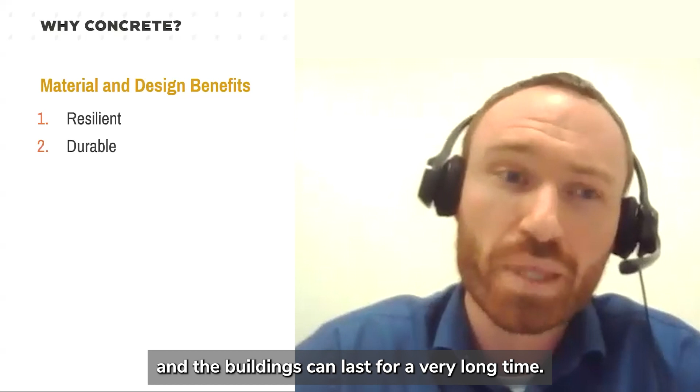First, it's very resilient. It can be detailed and constructed to perform well under seismic events, good for hurricane regions, has strong fire resistance, and the buildings can last for a very long time. Being so durable, they can last for decades and decades. And even when a concrete structure does experience some distress or have needs of repairs, there's well-established methods and materials for those repairs that can extend the life of the structure.

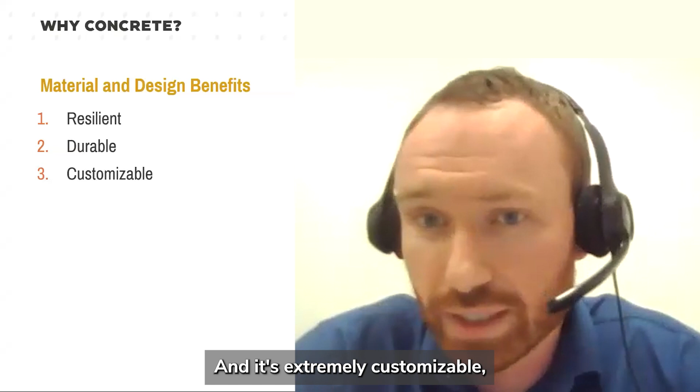And it's extremely customizable, both for the adjustment of formwork to make the different beam depths that you may want on a project, all the way down to the concrete mix design and how you can get different performance based on what you're putting into your concrete mixes.

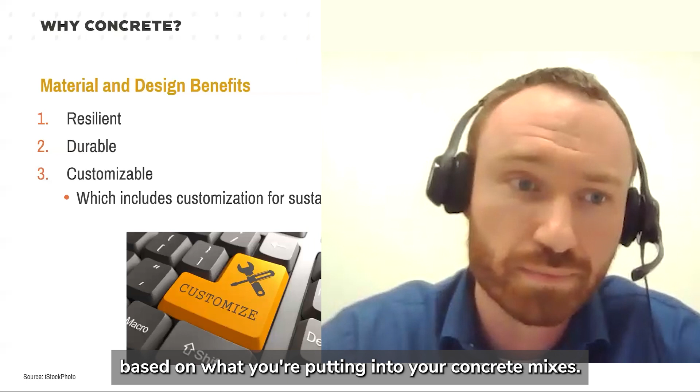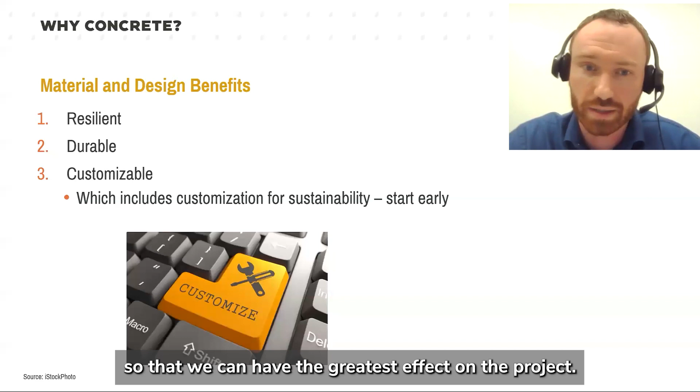And so this customization also includes customization for sustainability. And we definitely want to start this early in the design process so that we can have the greatest effect on the project. So a brief overview of the concrete life cycle and its carbon impacts along the way, starting from the mining of raw materials all the way to the end of life or demolition of the building.

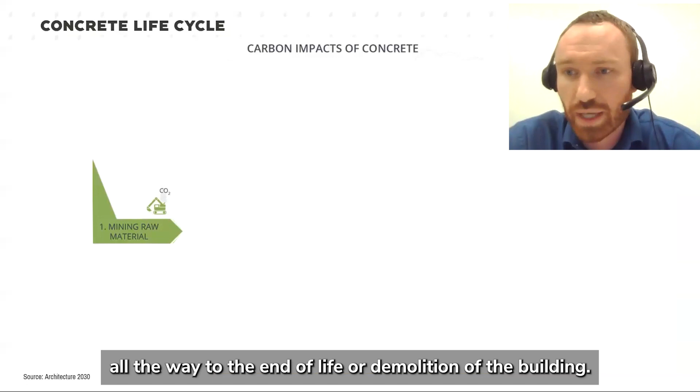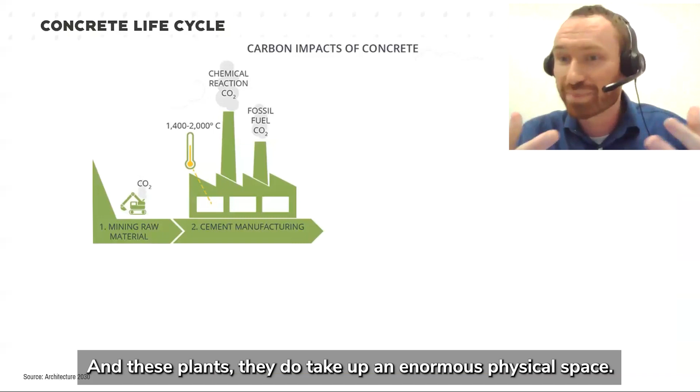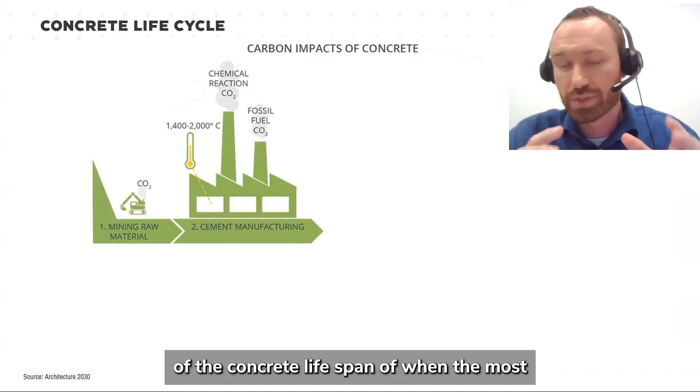So after the mining, the raw materials are extracted from the earth, they're brought to a cement manufacturing plant. And these plants, they do take up an enormous physical space. But the large image on the screen also indicates the largest percentage of the concrete lifespan of when the most embodied carbon is in the material.

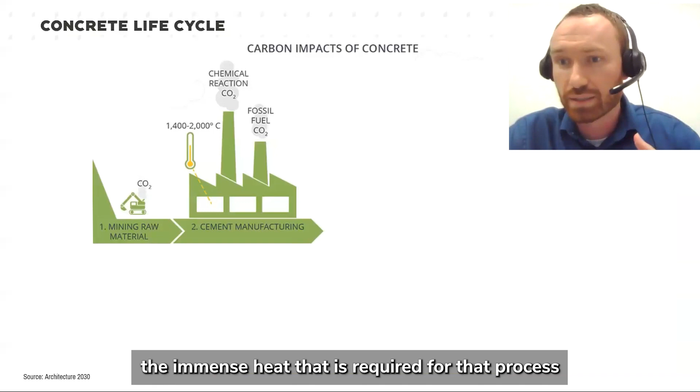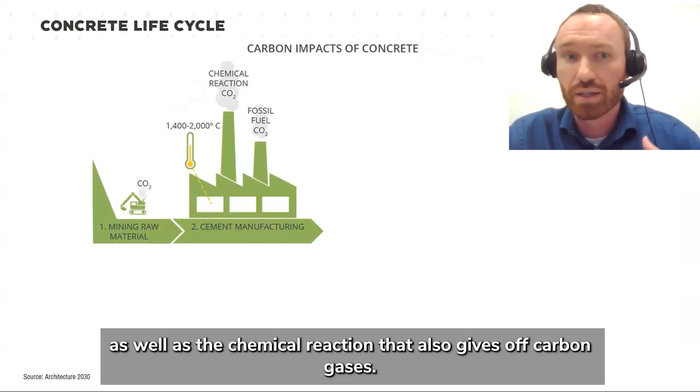So when the raw materials come in and they're heated up to form the clinker, the immense heat that is required for that process is usually produced by burning of fossil fuels. So there's the CO2 emissions off of that, as well as the chemical reaction also gives off carbon gases.

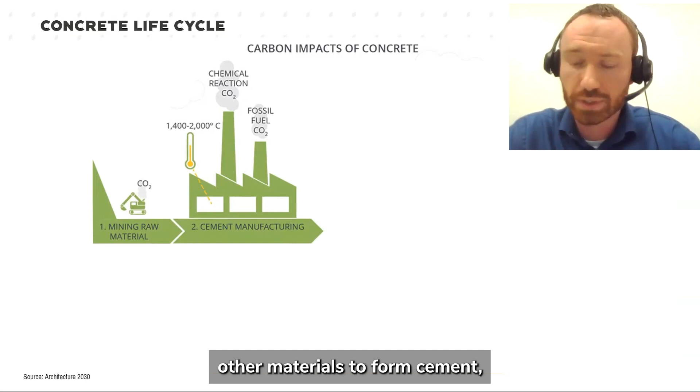So this clinker production, the chemical reactive ingredient that's then ground down and mixed with a few other raw materials to form cement, is a really big portion of the embodied carbon of the concrete material.

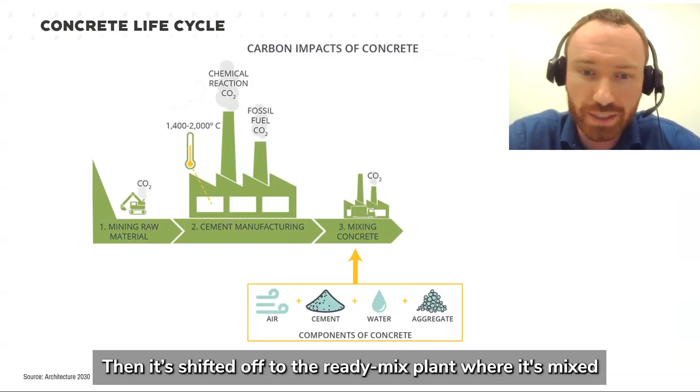Then it's shifted off to the ready mix plant where it's mixed with water, aggregate, any other admixtures, transported to the site, constructed, and then carried out for the rest of its building life.

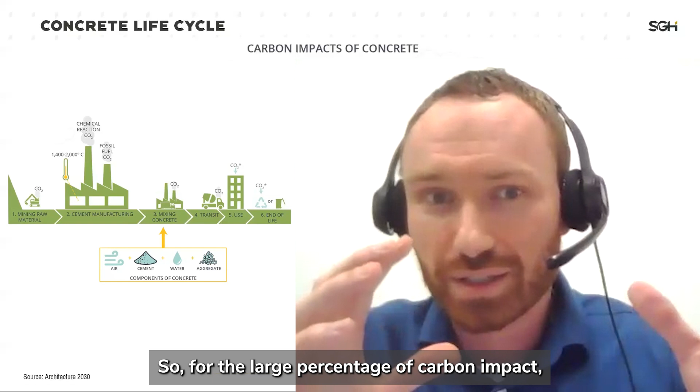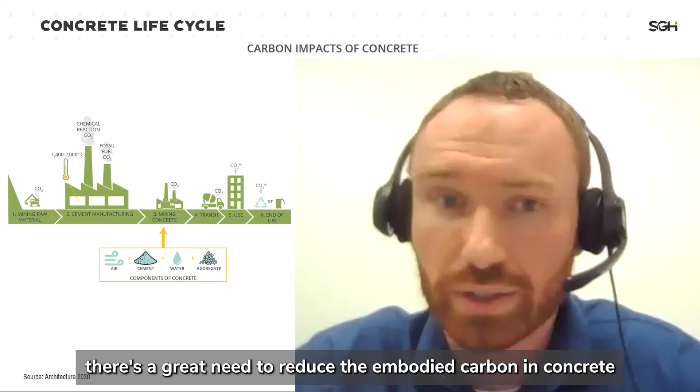So for the large percentage of carbon impact, especially in the cement stage, and with how common concrete is, there's a great need to reduce the embodied carbon in concrete because the material is so important.